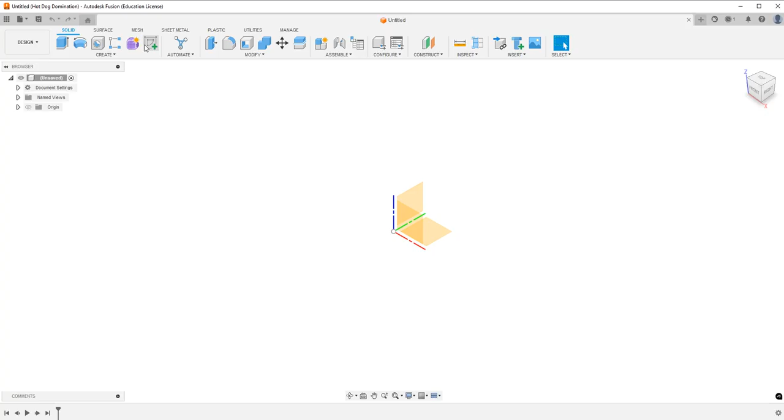So we will just begin. I'm going to start with a center diameter circle, and we will go off the center and bring this out. Even though I said the biggest outside diameter is 3 1/4, what we're actually going to do is make it 4 inches, so it'll just barely fit on the inside of there. Then we're just going to go with solid and extrude this.

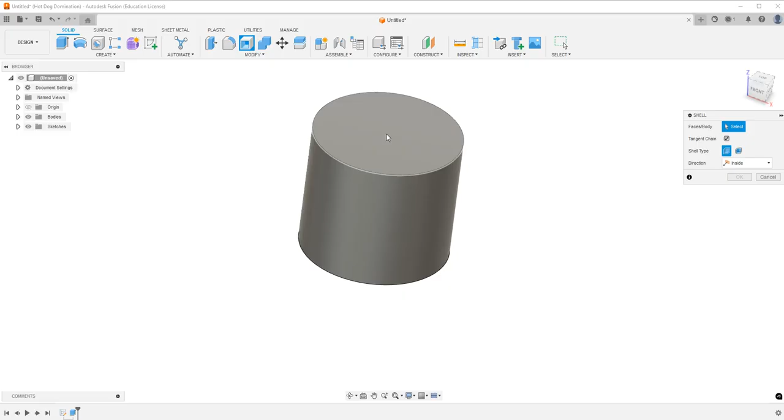So there's that. What we can do now is create a hollow kind of shape for it to sit in. We are going to hit this shell feature, and hit the very top of this because this is what we want to make hollow. We want the edges to be 1/8 of an inch, so 0.125.

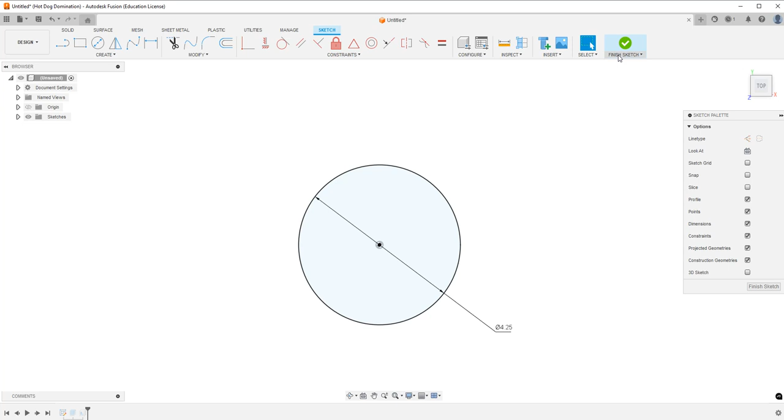And actually, I have to go and change something. This is going to be the inside where the mug is sitting. We actually have to make this 4.25 because of the size of the walls - the inside diameter is actually now going to be 4 inches. I'll show you what I mean, but basically you want to make this base 4.25. Then if we measure the diameter here, it should be 4 inches exactly now. You see, 4 inches because we made the walls 1/8 of an inch thick.

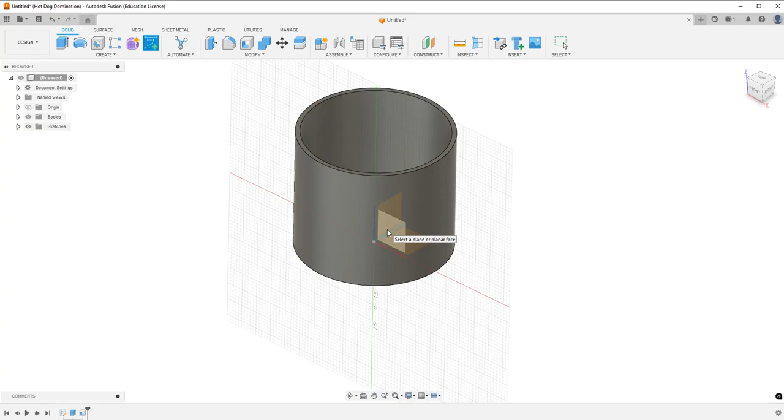So now I do need a slot for my handle for my mug, and that's pretty easy to make. You could just construct it on this plane and then just extrude it out, but I'm going to show you a little bit of a neater way to do that. It's going to involve a couple extra steps, but I think it's well worth it to make a nicer looking product. So we're going to go to construct over here, hit tangent plane, and hit this face right here.

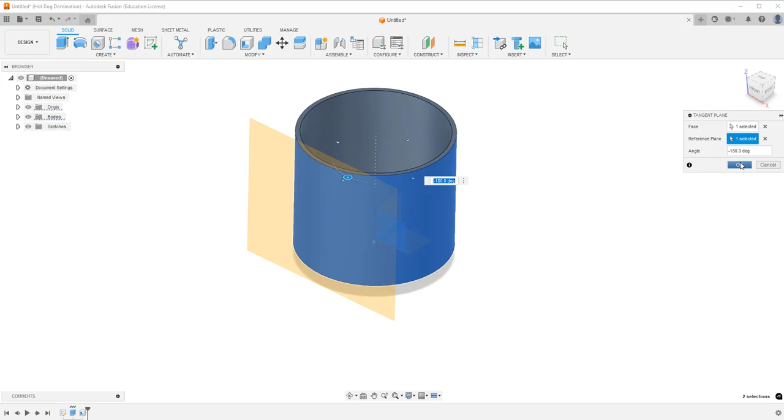And then the reference plane - it's going to be referenced to this plane here, which is the ZX plane, and it's on that side. I'd rather it just be on this side. I guess I didn't really need to reference that, but in any case, I'm going to hit this and start sketching on there.

Now we are going to hit center circle diameter. We're going to hover above here - not click, but hover and get that dotted line, and bring that out. I'm going to make it, I don't know how thick, maybe like 1.25. I think that's more than big enough, and we will make this sit about an inch above the origin.

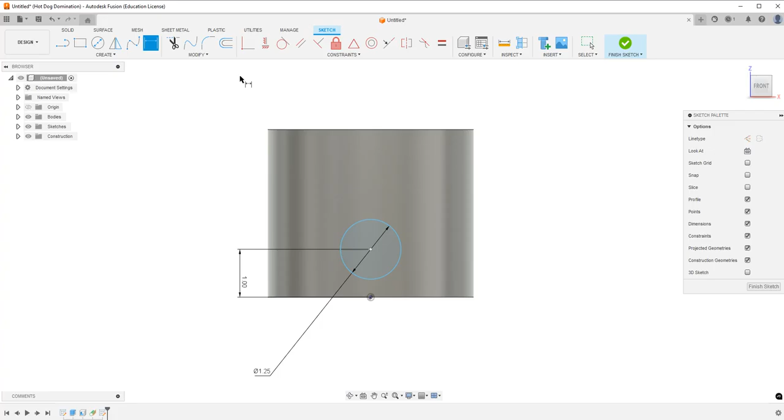As you can see, this is not currently set in place. I can grab it and move it around. So what we're going to do is hit horizontal vertical and make sure that the points are sitting completely vertical to each other.

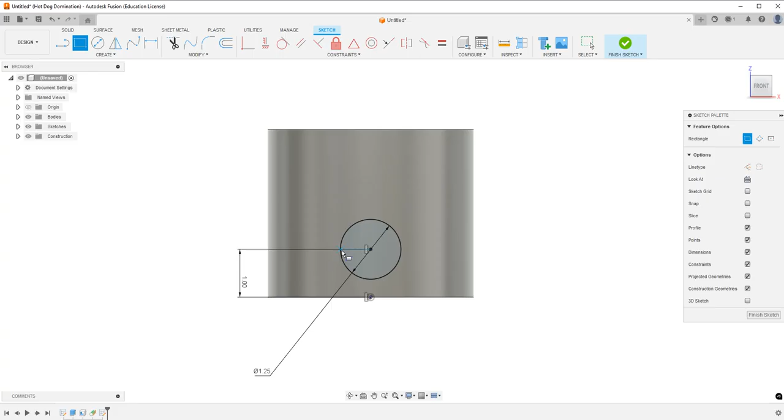Next thing, we're just going to go with a 2-point rectangle, and I'll show you a neat way to do this. We're going to hover above here, drag it out until we get that X, and bring it out. It does not matter how far up we go, not yet anyway.

We're going to hit coincident and make this coincident about here. One thing to keep in mind is I can still grab this and move it around. And I want this to be tangent to this circle. So we're going to hit tangent, and we're just going to go with this line and this circle, and bam, there we go.

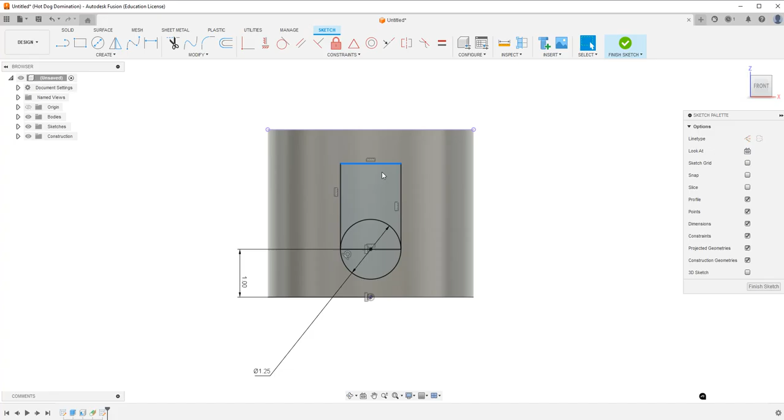Next thing I'm going to do is I want it to sit collinear on here. So I'm just going to hit collinear - oh, excuse me, I'm getting a little ahead of myself. I need to go to create and go to project include, and I'm going to hit project, and project this top line so that I can make it collinear, because it's not technically a part of the sketch surface. The sketch surface is not going to see this here because I'm technically making this whole circle up here projected onto this flat surface.

So now that's selected, I'll hit collinear. This is already selected, so I just need to hit here and we're good.

Now I want to make these nice and rounded, and there's two ways to do that. I can finish here and emboss it. I'm going to show you a different way, which is to do it with diameter circles, because the fillet tool will not grab this projection. So I'm just going to show you a new way to do that with center circle diameters.

This is not something you really need to do. You can just use the embossing tool and just use the 3D sketch fillets. But again, sometimes you're not able to do that depending on your project - you kind of have to do it this way. So I'm just going to show you this way.

First thing we're going to do is just create two circles in any spot, and we're going to make them equal to each other. And then we are going to define their size - I'll just go with 0.75.

Now what we're going to do is just set the circle's tangent to both this projected line, and we're going to set a tangent to this line here. So again, that's that one. We're going to set a tangent to the projected line and to the side line.

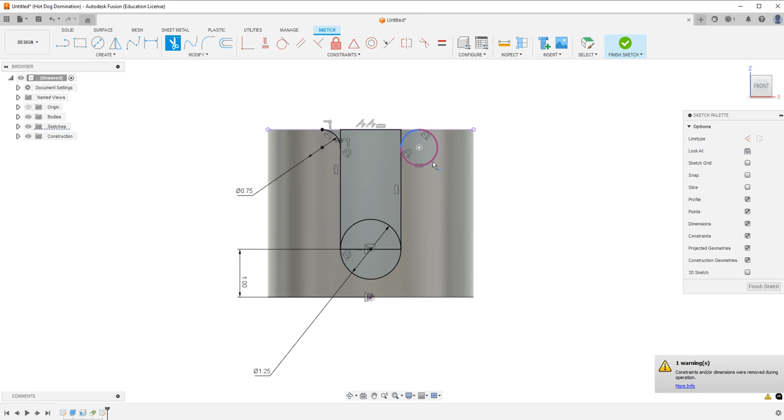And that's it. Now all we're going to do is just trim here, and we're basically done. And then I'm also going to trim here and this. Let's see now - oh, let's make this tangent to this, and yep. And that is going to be the slot for where our mug is.

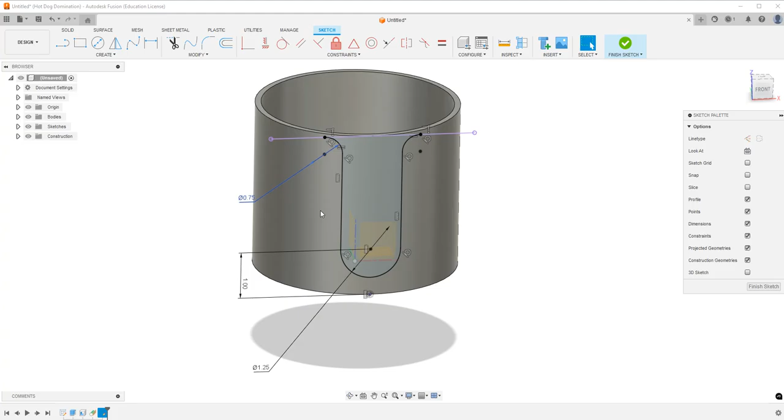Let's delete this. So what we're going to do, like I said, you could just make it on this plane here, but again I just wanted to show you a nice way to do that, because I'll show you why here.

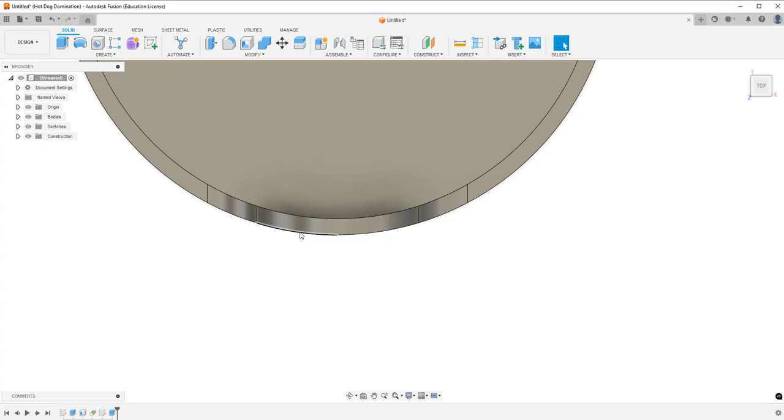You can just extrude this and go back, and that looks fine, but it's not really matching the curvature of the object. It's just kind of going straight in, and I feel like that's not really great practice when you're designing something, I guess, unless this situation really does call for it.

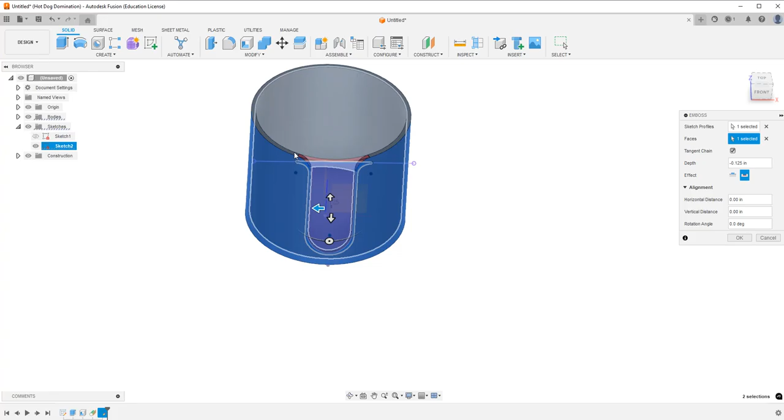So what I'm going to show you is go to sketch, reveal the sketch. We're going to use this embossing tool, select this sketch, and select this face to emboss. Oh, it's already selected. We're going to go minus 0.125, which is the thickness of this right here, and hit OK. Now if we get rid of the sketch and look on top, you see it's matching the curvature perfectly.

Okay, so now that that's done, we are going to make the part that's going to be holding this holder onto the desk. Excuse me, I can't really talk right now.

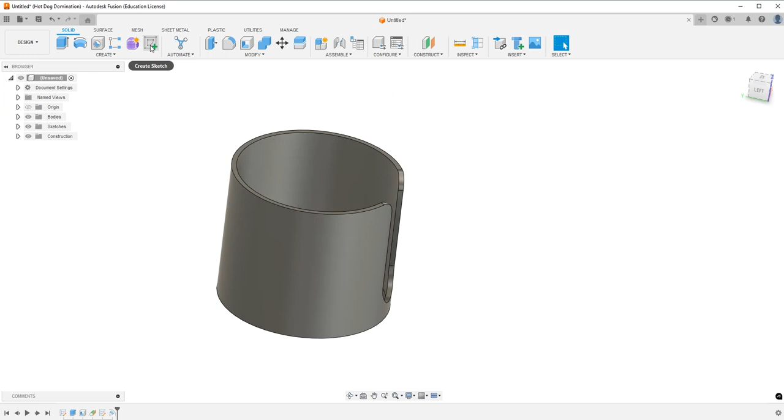So we're going to hit create sketch, and we're going to do it on this top lip right here. I'm just going to flip this down so it's a little easier for me to envision. We're going to use the line tool and move all the way out, and we will define the length. We'll go, I think 4. I think 4 will be good.

Next, we're going to make a line, not a construction line, just an arbitrary length line out here, and then connect it to the midpoint. So midpoint constraint, this point to this line, and now it's perfectly in the middle. And we are going to bring this out.

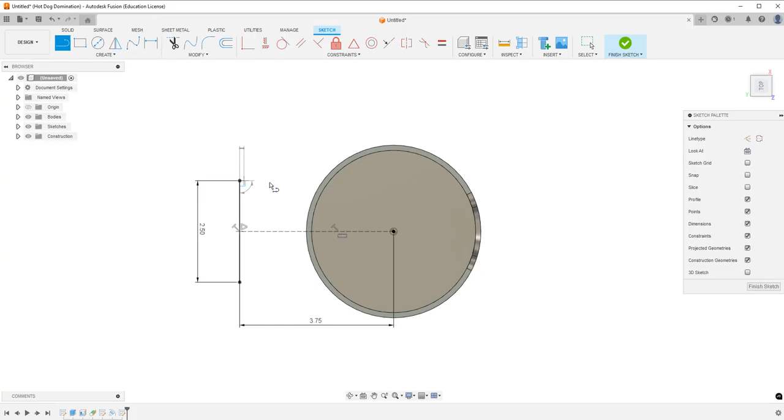Well, that's a nice size. We'll go 2.5, and actually we might even go like 3.5. No, 3.75, that's fine. So then we're going to have two lines going out, and they're just going to intersect exactly where this is.

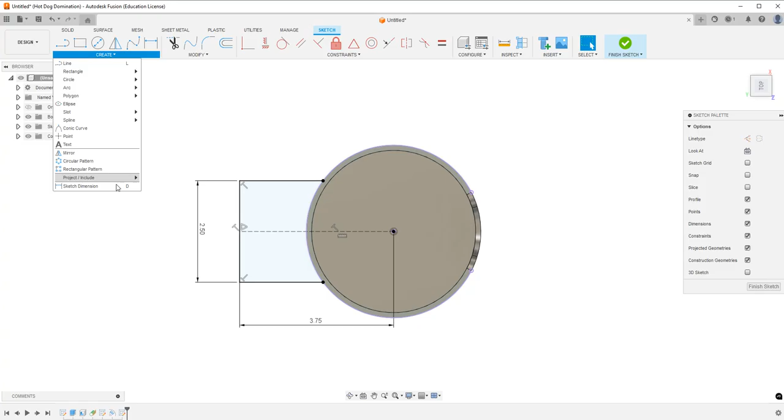Now, you could do a center diameter circle from here out, but just to keep you from doing that, because you could mess it up—at that point you're working with sizes and might not hit exactly here. So the safest bet for me is just to project it. Go to create, project include, project, and hit this outside.

Then we're going to go to solid, extrude, and we're just going to extrude this down. I want it to be fairly strong, so we'll go down like half an inch. Okay, so I like the look of that.

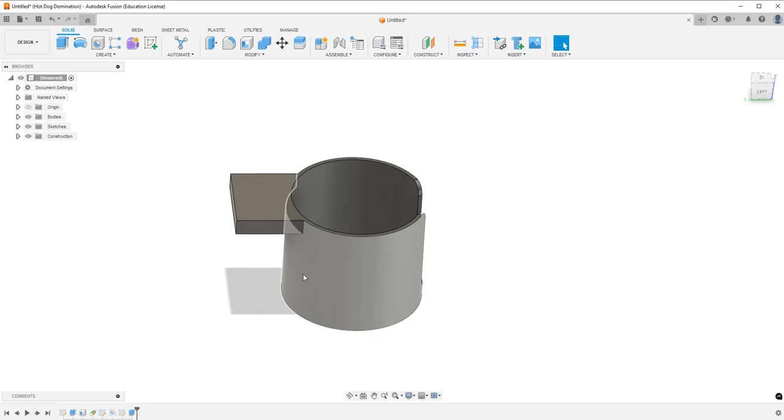And we actually have to make this again, but more down here, because we need something for our thread to go through. And we can't just do that in midair, so we're going to create an offset plane.

It's going to be—I'm going to hide the bodies—off of this plane, which is the XY plane, right? Oh geez, oh gosh, there we go. So it's going to be off of the XY plane.

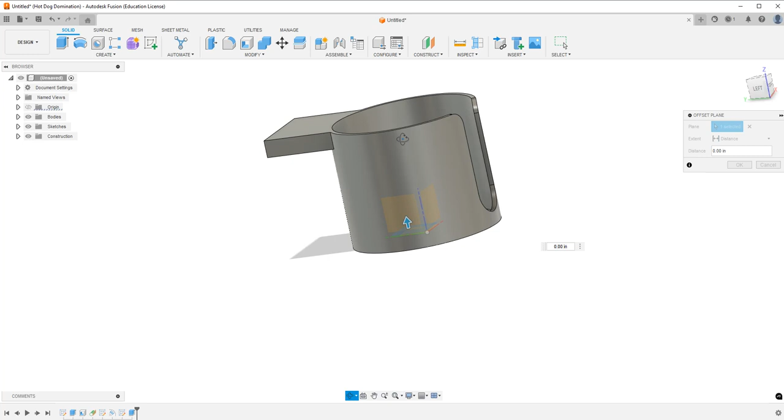And something that I do to help me envision it, I'll go off of the normal plane, which is the ZY plane, and bring it up to how far I think I need it. We'll maybe bring it up like 1.5. And we can always adjust this as we need it.

So now we're going to create a sketch on this plane. And all we're going to do at this point is project this, this, and this. And now we're going to do the thing I said don't really do, center diameter, and connect it to this point.

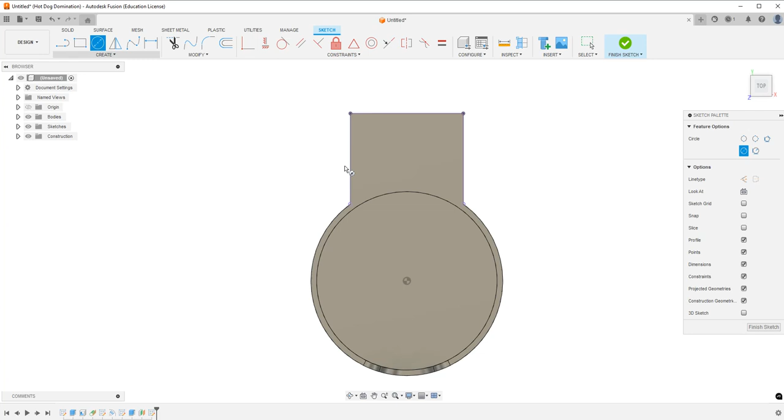Then we're going to just trim that. Okay, no—oh, I just trimmed it again on accident. So there we go. And now we can bring this out. I think that's a good size.

We can bring this down another 0.5, and let's measure the distance between them. So from here to here, 1.5. At this point, you would measure your desk and see how far it would be.

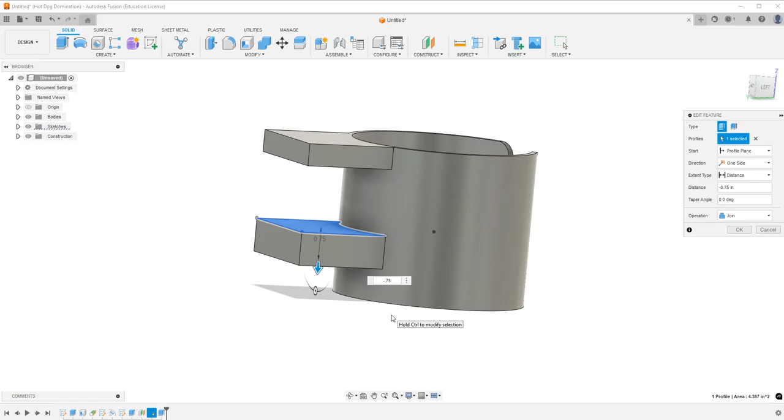Then, since there's going to be a thread in here, I might actually want it to be a little thicker. So maybe minus 0.75, and the sketch I'm going to bring down, instead of a 1.5 distance, we'll go like 1.25. So now there's 1.75 in here.

Okay, next what we'll do is create a hole right here, and that hole is going to have the thread so that we can lock this onto the desk, because right now we just have an open space, right?

And in order to model here, we're going to use section analysis, get rid of the bodies again, select this, and open up and unhide the bodies. Now it looks like nothing's unhidden, but it's the section analysis doing its job.

So we're just going to take this, grab it, and drag it up until we see this little blue section, until it turns the same color as the solid. And there we go, we're done.

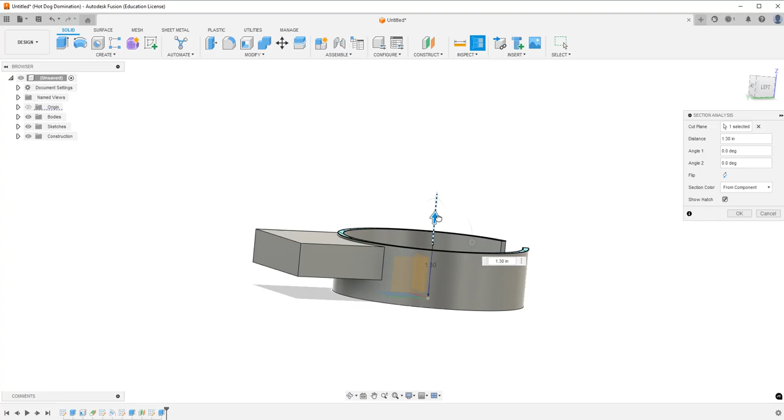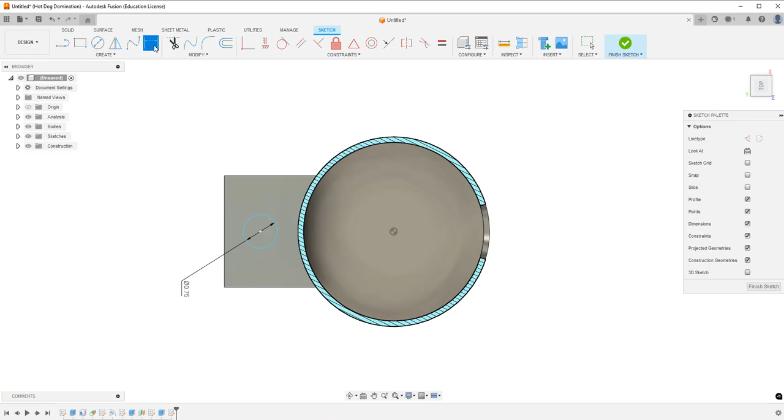Now we can perform a sketch on here. We're going to select this, create sketch, and create a circle, and it's really going to dictate how much space we have. It looks like we can comfortably do a thread with a 3/4 diameter. We'll go off here, call it 3, maybe 2.875. I want it to be close to center, but the actual center doesn't matter.

As you can see, this is still not fixed in place, I can still move it around. So what we'll do, like we did with the first one, is go horizontal, vertical, hit the center here, and hit the origin, and that fixes it in place.

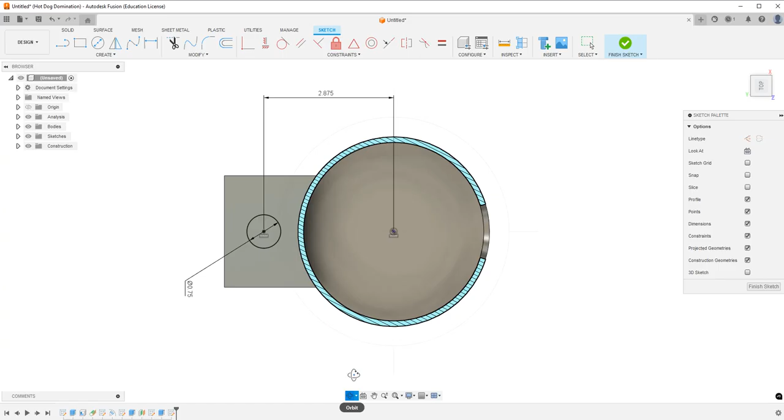Then we can do solid and extrude this all the way down. Now, we could have done that when we extruded this here, we could have had that circle, but in a case like this, when we have a thread here, I want to be able to control the size of the circle on a separate sketch.

Now we're gonna unhide this analysis, and that's what we got. We're gonna create this thread now, and creating a thread is very easy, so stay tuned to the end of the video, because with a 3D printer you can't just create a thread and expect it to work, since threads that they model are going to be exactly like they are in the real world. With 3D printers, you have to account for shrinkage, cooling, and all that kind of stuff, but I'll show you what works for me.

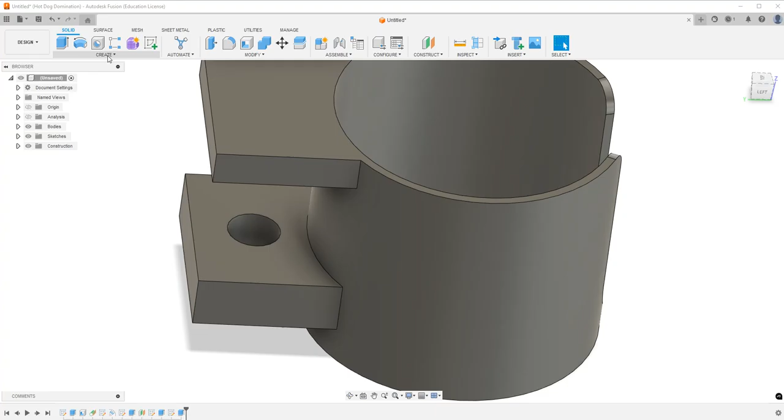So we're going to create the thread, hit create, go to thread, and just highlight this here, and it should auto-populate. We have a 3/4 10 UNC thread, which is exactly what I want to use. Let me open this back up. So in order for the 3D printer to actually make the thread, right now it's still a solid cone. Open this up, and you're gonna hit the modeled function, and now we have actual threads in here. But for the meantime, we're gonna leave it unmodeled, just leave it as a cone.

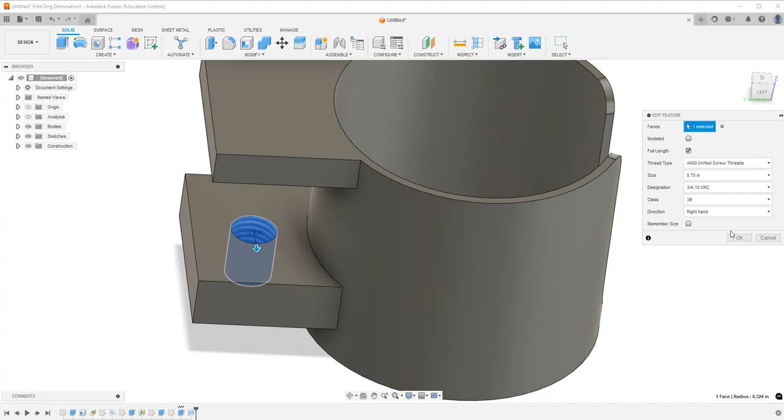So now we have to go through and make the threaded rod that's gonna be here. Right now, we're just gonna save this. We'll call it desk cup holder. We're going to save it in our project, wherever we're going to save it. Just make sure it's saved, and we're good.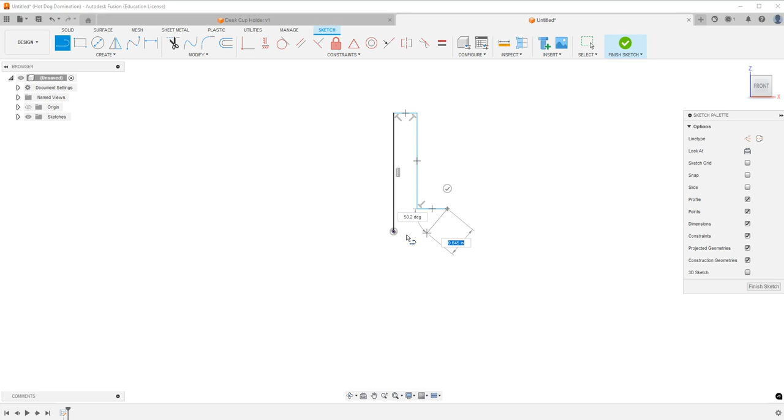It is there. So we're going to make a new design, and this is going to be for the threaded section, the threaded rod. We're going to create a sketch and go off of here. What I'm going to do is create the basic outline, which is just going to be the start of what looks like a bolt head.

The first thing I want to do here, since we are doing a 0.75, is revolve it around this axis. So a 0.75 thread divided by 2. Next thing is this here, which we should check to see what the distance is from here to here. And this is another reason why I made this not modeled, because it's going to be a lot easier to use our measurement tools. We're going to show snap points, go from here to there: 0.75. Beautiful. So this has to be at least 0.75 in diameter.

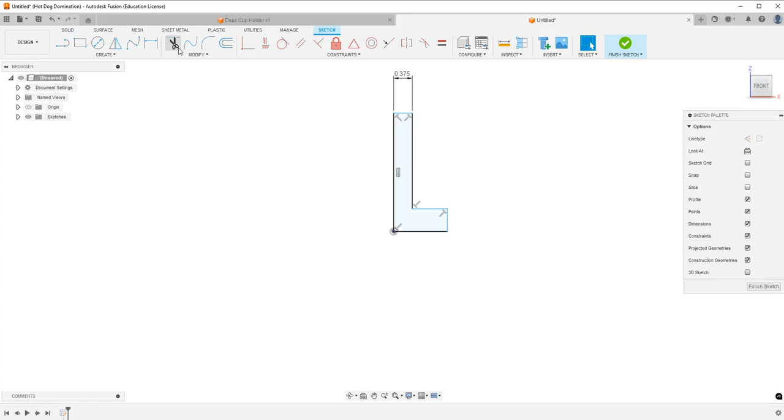And instead of 0.75, we'll go with 0.65 just to give ourselves some breathing room. This can be any dimension you really want, and we'll just call it 0.5 just to make it nice.

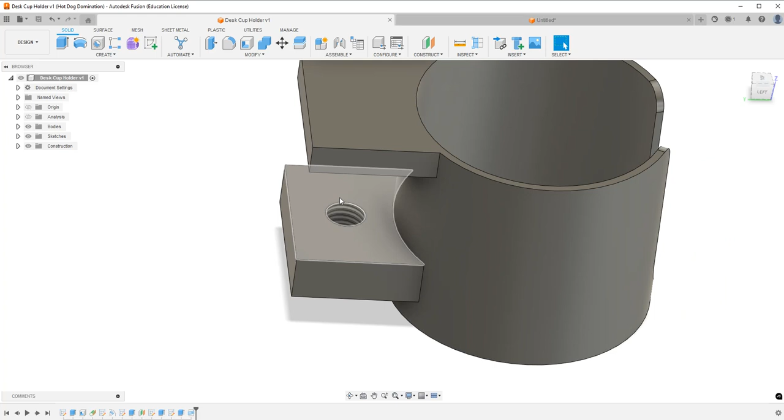Now, what we need to know is the distance from here to here. So we're going to inspect. We can get rid of the snap points right now. We're going to go from here to here. Or if you want it to be a little more exact, we can go from here to here, 2.5. So we're measuring from face to face, not line to line, because in case one of the lines is curved for some reason, it's better to go face to face.

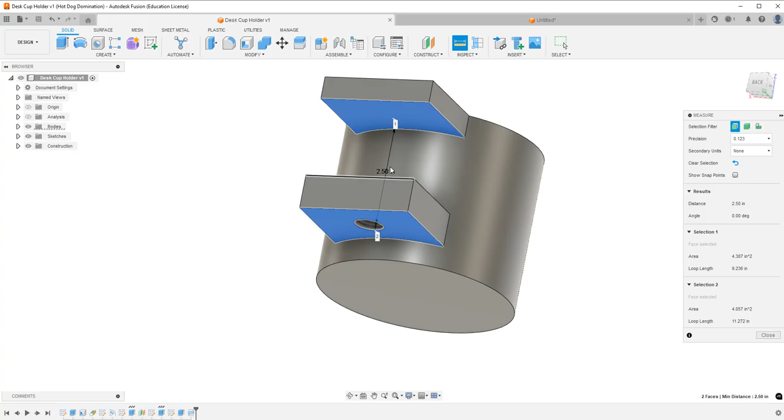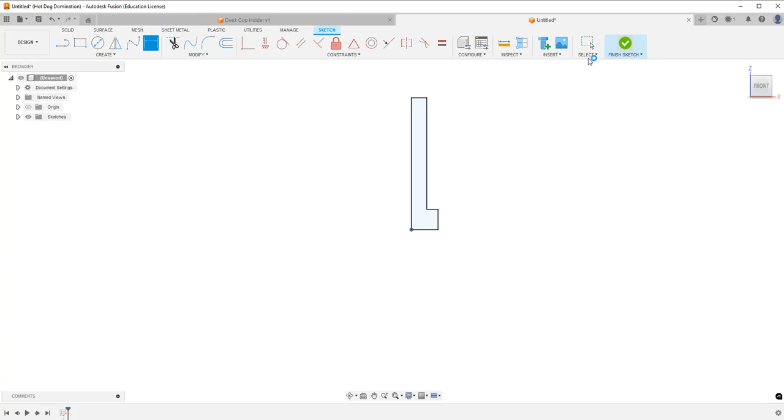Now, of course, it doesn't have to be exactly 2.5, because we're going to have a little foot here that's going to be placed on there, but it's better to have more thread than less. So we're going to go here, and it has to be 2.5. I'm going to make it 2.5 plus 0.25, so 2.75. There we go. We're going to finish the sketch, and we are going to revolve it.

And it's already selected the profile. We're just going to revolve it around here.

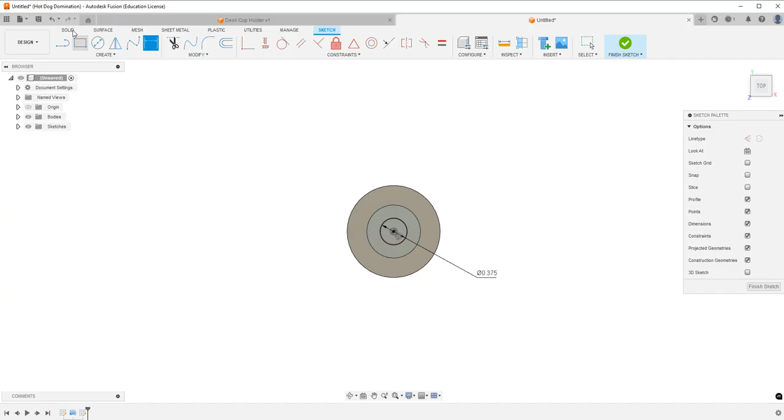Next thing I want to do is where the foot is actually going to be glued into here, and I want it to be glued on the center there. So we're going to create a sketch, and I'll show you exactly what I'm talking about. We're going to make that 0.375 about the center, and we're going to go to solid, extrude, and we're just going to extrude this down. It doesn't matter how far, we'll just go minus 0.4.

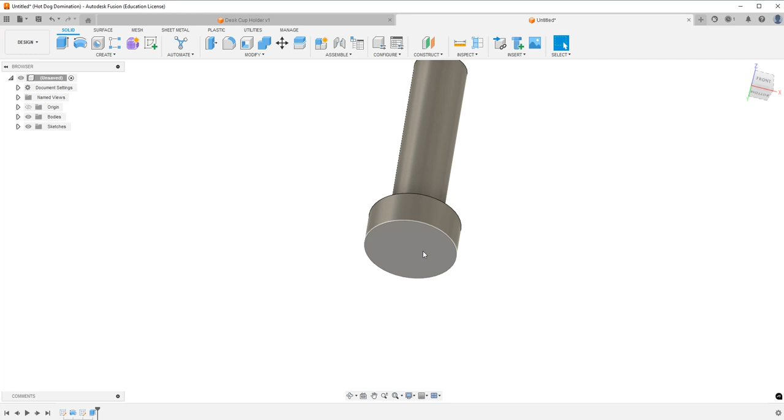Now, we could make this a hexagonal head, but what I'm going to do instead is bring out like a little latch that you can grab onto. So we're going to create a sketch on this face, do a 2-point rectangle, and we're going to do a center rectangle. We're going to go off the center and just kind of drag it out as far as we really want, and these dimensions will kind of be up to us.

I'm going to make this 0.375, and I'm going to make this 1.65. I think that'll be fine.

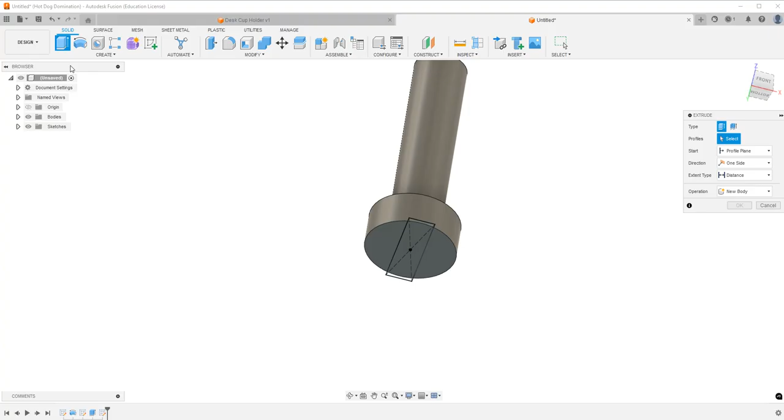Oh, you know what we do need to keep in mind? The distance from the center to up here - we can't have it be more than 0.75. So we'll do 0.7 times 2. That's fine. So we'll do that, and then we are just going to extrude this out. Make sure you hit every face, and we'll extrude it out 0.7. I think that should be good, and yeah, I like how that looks.

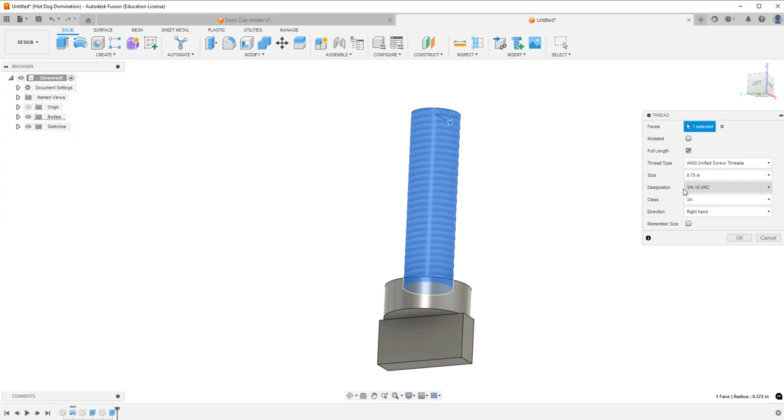So now what we're going to do is make threads onto here. Again, we're going to hit create, go to thread, and we're just going to select this face, and it'll auto-populate 3/4 to 10 inch UNC, 3/4 - 10 UNC. Okay, I like how this looks.

I am going to add fillets to everything last as I usually do. And we're going to save this, and we'll just call it a desk cup holder thread.

Last thing we're going to make is the part that is going to actually clamp everything onto the part that's going to clamp the desk onto the desk.

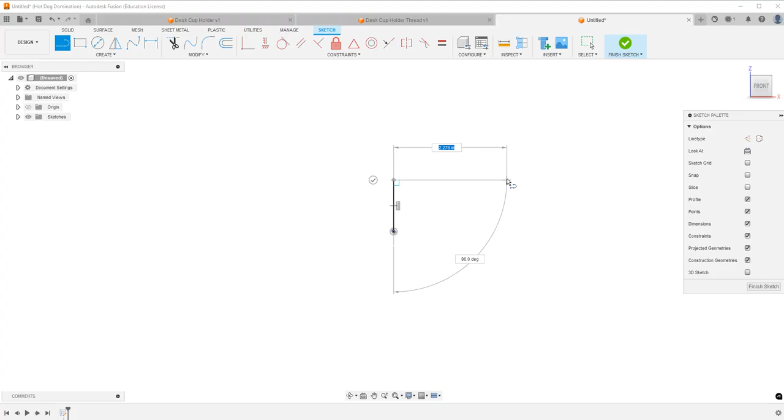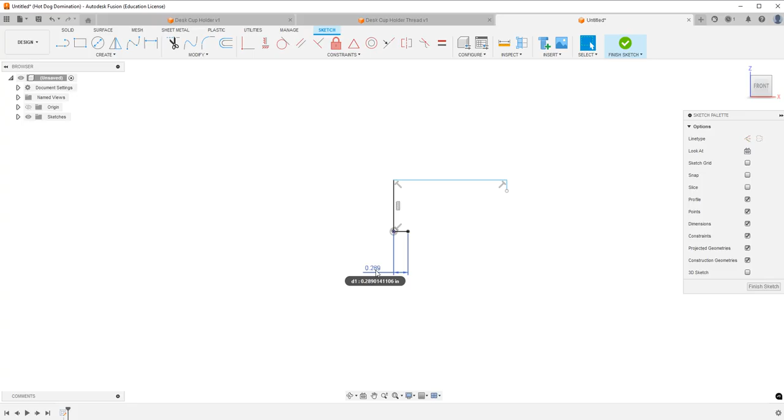So we're just going to create a line, and again, I'm just going to do a general outline of what we need. So I'm basically doing this side and these two and these three sides here. I'm leaving this blank over here on purpose, and I'll show you why. So right now, this area over here is actually what's going to - oh wait, hold on, I'm missing something, I apologize.

This is gonna go down. Okay, there we go. So now this is actually gonna go in the hole that we created.

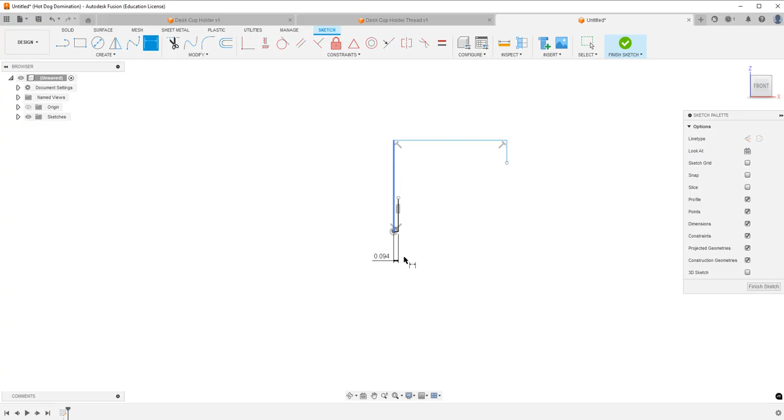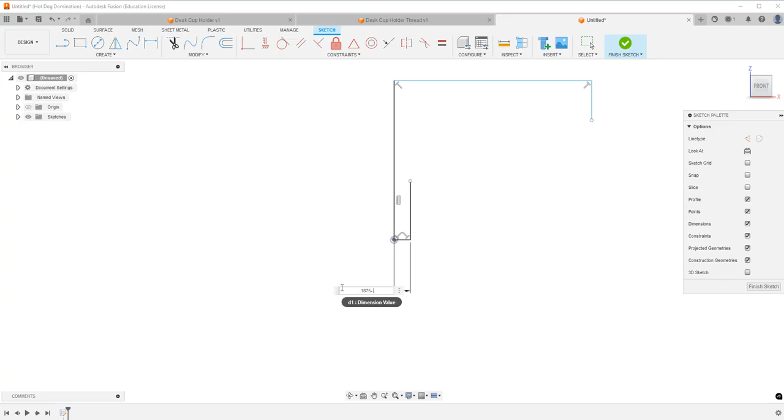Okay, so next thing that we're going to do is we're just going to kind of adjust this to how we want it. It's nothing really all that crazy. This has to be 0.75 at max, so we'll make it 0.7.

Then we'll make this - here, let's just move this down actually. We'll eyeball it first and then we'll set it. All right, here to here, 0.92, we'll maybe call it an inch. And then this we'll call 0.125.

All right, so now here's what I'm going to do. I'm going to create a line, drag it out, because what I want to do is create an arc, a 3-point arc, and I'm going to go here, here, and bring it out.

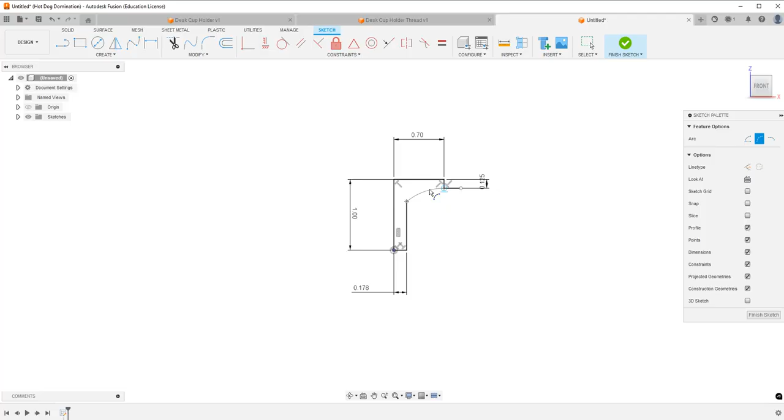And now, because of this line, it will automatically populate a line that's tangent to this line. Oh, and because of the depth that we went here, which is 0.4, this is going to be something less than 0.4, 0.375.

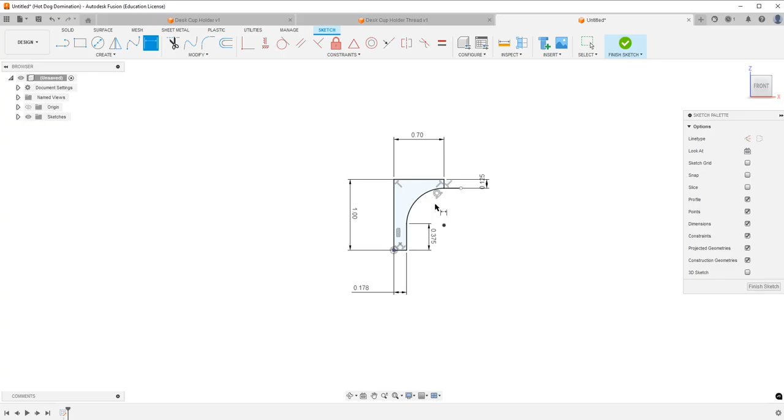So we have to get rid of this, delete this, go 0.375. There we go, now it works. And now we can make this the size that it needs to be.

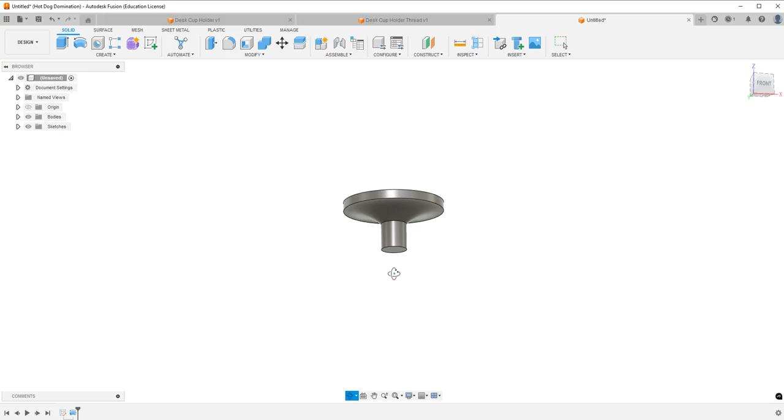And that's it. And what we're going to do is we're going to revolve this around this axis, and that is going to be kind of like our little stomper thing, our little foot. So we're going to save this, and we're just going to call it desk cup holder foot. Okay, that's it.

And now, as I usually do at the end, I will always add fillets to things.

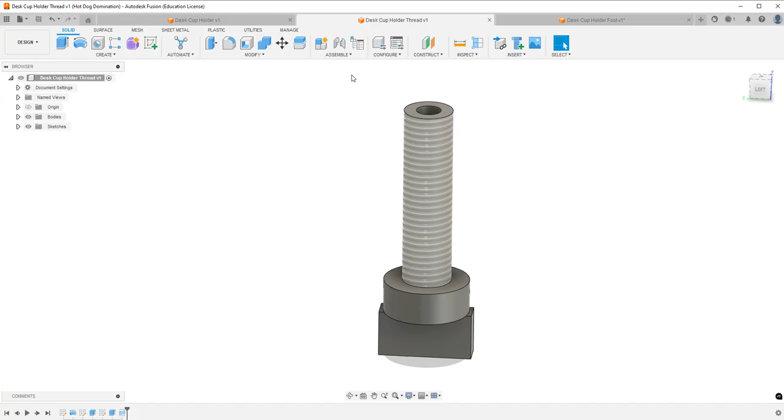This will be a 0.02 fillet. And then this will be, I'll show you something here. This will be a 0.03 fillet.

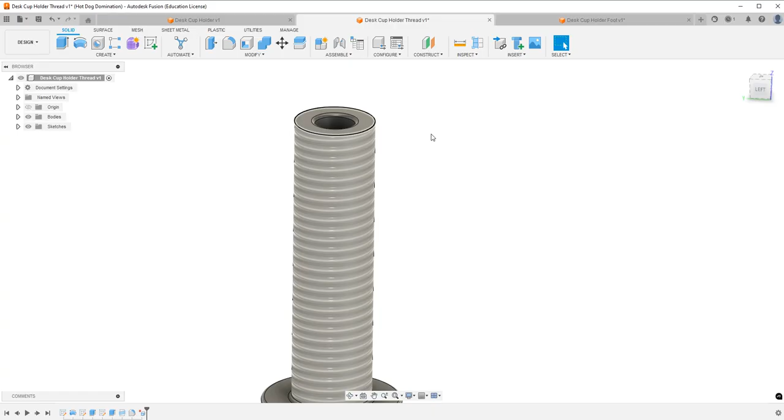This fillet here, so if I actually get rid of the threads, the fillet that's... well, I can't really do that because of how I organize it, but it's fine. This fillet here, I'm actually going to highlight it and delete it because it could potentially mess up our thread, and we don't want that.

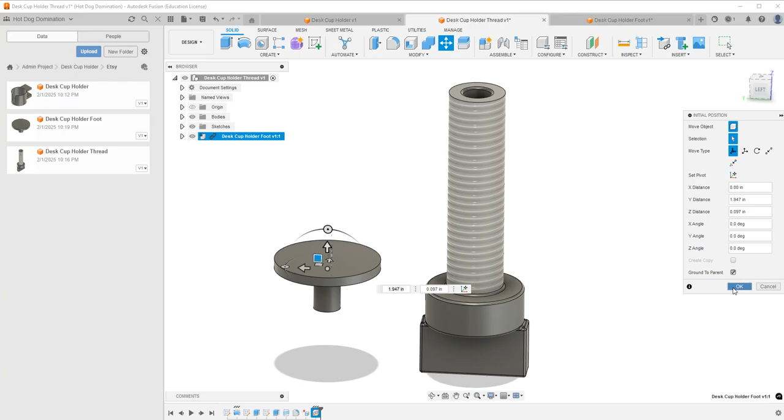So now we're going to highlight this thread, or actually no, not yet. We're going to open up everything, and now we're going to start putting everything together. So I'm going to get the desk cup holder foot, drag it out here, and it'll populate right there. I'm just going to move it out for now. And now what I'm going to do is I'm going to angle this down.

I'm going to hit the joint feature, and I'm going to hit this circle here, and then I'm moving up, and I'm going to hit this up here. Make sure you're hitting the top one, not the bottom one, and it will automatically join right there. And you can kind of see what we're going for at this point. So we're going to hit OK, and we're going to save this, and OK.

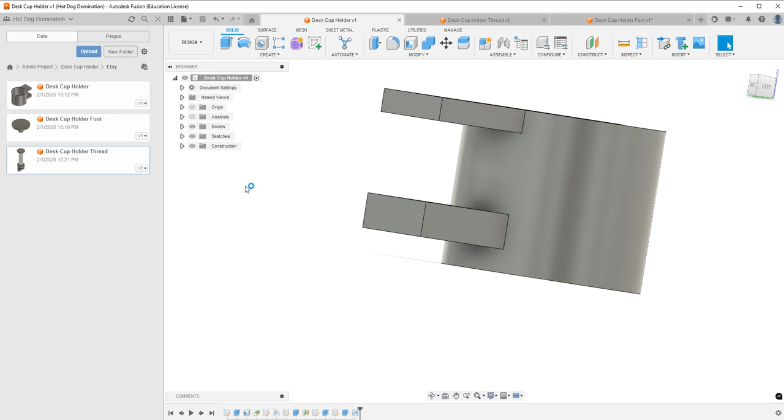So now when it saves, it has the little desk cup holder foot. And we'll go to the desk cup holder original, and what we're going to do now is we're going to take the desk cup holder thread, and we're going to insert it into here. All we're doing is hovering our mouse over this, holding the mouse down, and dragging it out here. And now it's there. So we're going to take this and bring it out.

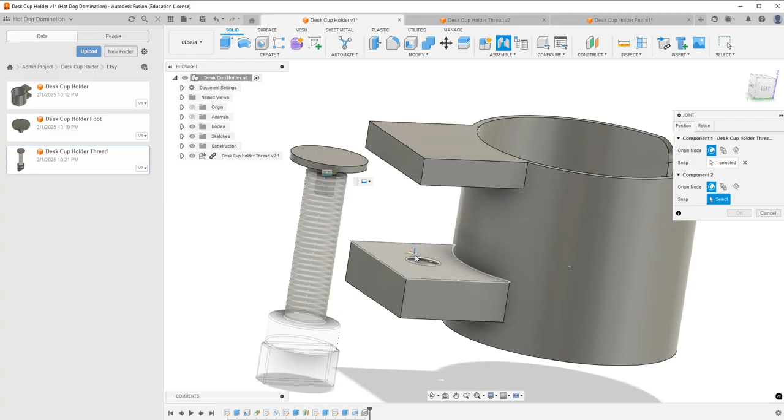Hit OK. So now what we're going to do is we are going to do another joint. We're just going to go with the top here. I'm going to angle it a little bit so you guys can see better. It doesn't really matter at this point where you put it because it's for visual purposes, but I'll just join from the top here to this right here. Make sure it's snapped to the center, and it moves all the way down there like that. We're going to hit OK.

And now we can grab it. No, we're going to have to highlight this. Because it's a rigid selection, I don't want it to be rigid. I want it to be a slider joint. See? So now it's moving up and down. And now I can grab it and move it up and down.

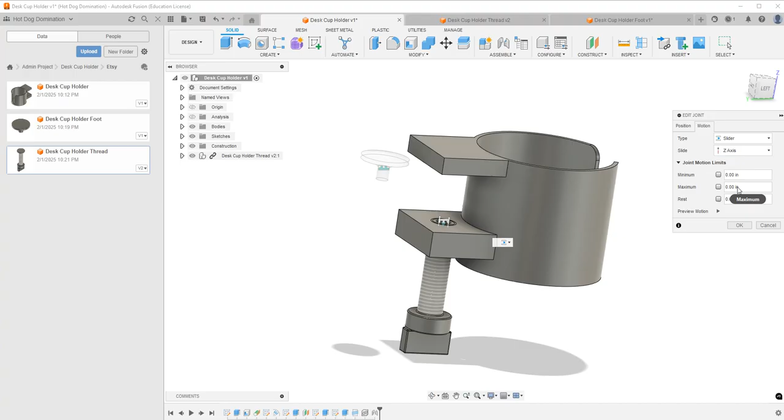What you can do is with the slider joint, you can establish your minimum and maximum. I'm not going to do that for here, but I believe the minimum would be here and the max. Hold on, we're going to highlight this max. The max would be like 2.5, I believe. Oh, okay, so instead of a maximum, we're going to go with a minimum 2.5. Maybe a minus 2.5. There we go.

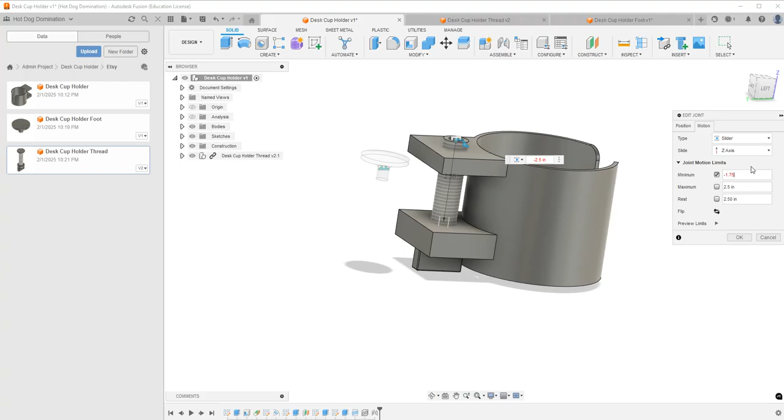Oh, well, it's going to be more like 1.75. It's going to be the distance from here to here. So now I can't slide past that. But like I said, for our purposes of what we're doing, it really doesn't matter. So now we have this here, and we can slide it up and down, and that is our cup holder.

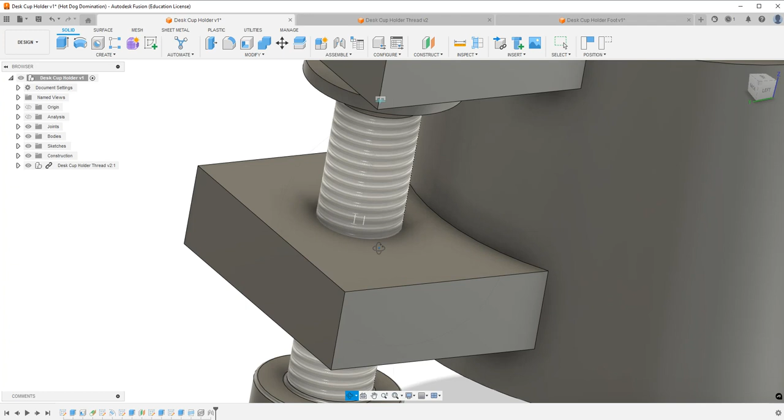But like I said, we need to actually model the threads, because as you can see right now, if I do a section analysis and go here and flip... come on man, what are you doing to me? You can see that these are actually digging into each other. So when you 3D print it, these will not fit. So now we are at the point, yeah, see, this is hidden inside a little bit.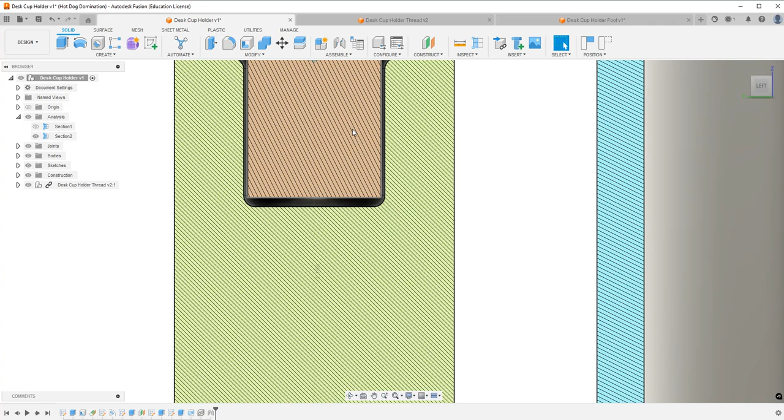Just so you guys know, this is planned to be glued in here with like JB Weld or something. So if you want to adjust the diameter here to be a little bit bigger so it's a tighter fit, you're more than welcome to. I was planning on just hot gluing or super gluing it in there or something.

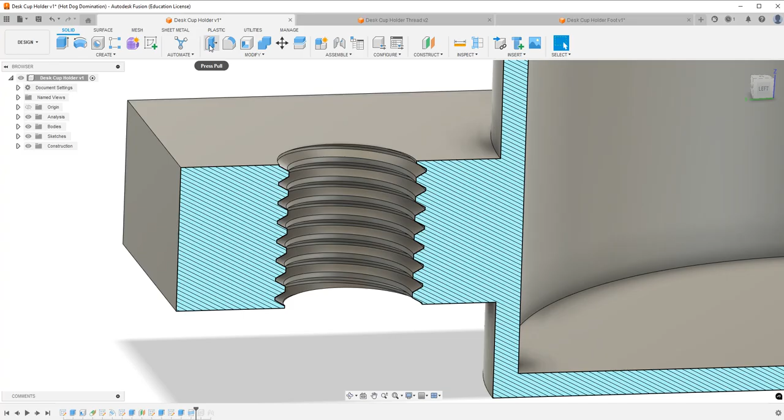Okay, so next thing that we're going to do is we're actually going to model the threads. So we're going to hide this joint, open up the threads, and we're going to model them. Threads, when you 3D print them, like I said, they're not machined, they're not precision made. So we're actually going to have to shrink up these threads to accept the threaded rod here. Because if we don't, it's just going to do weird things. It will not nicely bind together. If you guys want to try 3D printing the thread without what I'm about to show you, you'll see for yourself that it will not work. I have done some experiments myself and found this to work. So we're just going to press pull.

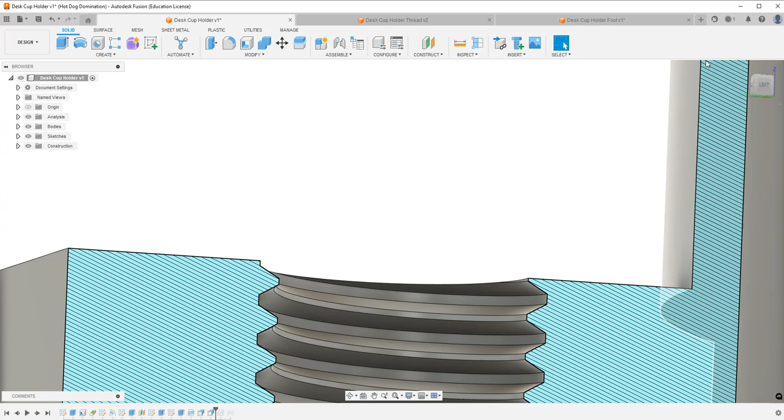We're going to hit the top of the thread, and go minus 5 thousandths in. We're going to do the same thing with the bottom. Press pull the bottom, go 5 thousandths in. And then we're going to do the actual face of the thread.

Ignore what I just said. Hit the face of the thread. We're going to press pull here, and here you can go anywhere from 5 thousandths to 10 thousandths. I'm going to go 5 thousandths.

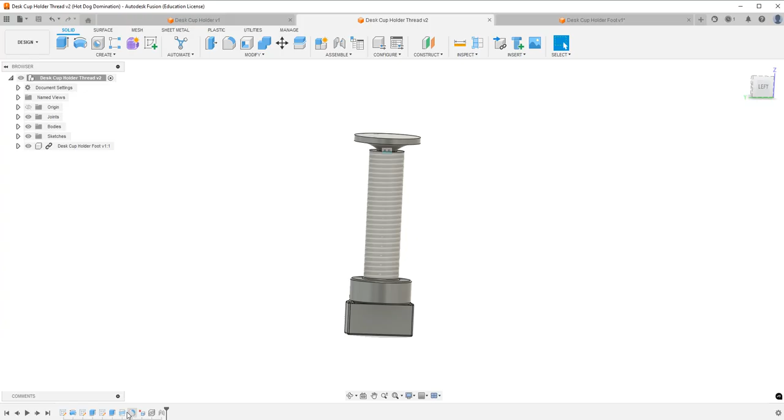Okay, so now we're going to save this. Hit OK, and we're going to go back to this thread here, and model the thread. This one does not need to be adjusted.

Uh-oh, some stuff happened. What happened? Let's see. Oh, it doesn't like that I did all that. So what we're going to do is just delete this stuff here. Yeah, that's fine.

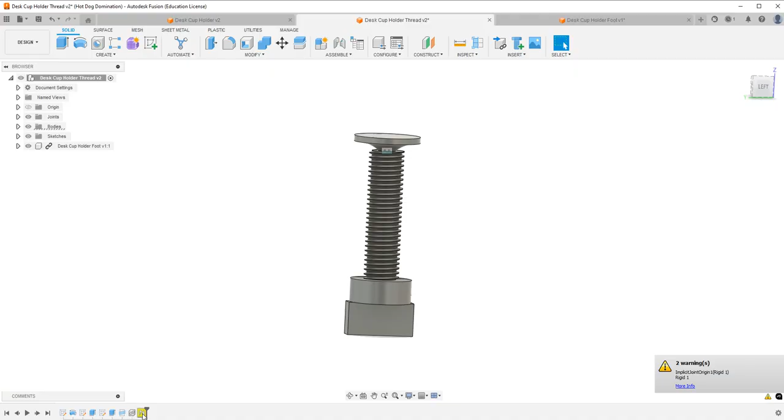And that's missing its reference. Okay, so we're just going to cancel, and delete this. We're just going to do all that over again. It's not really a big deal. Sometimes you just gotta figure some stuff out.

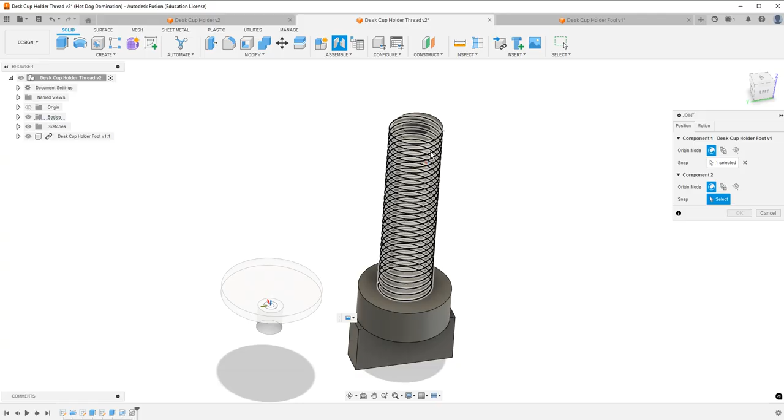So we're going to go here and right there. See if that works. That works perfectly fine. And then we'll just fill in everything ourselves. It's not a huge deal.

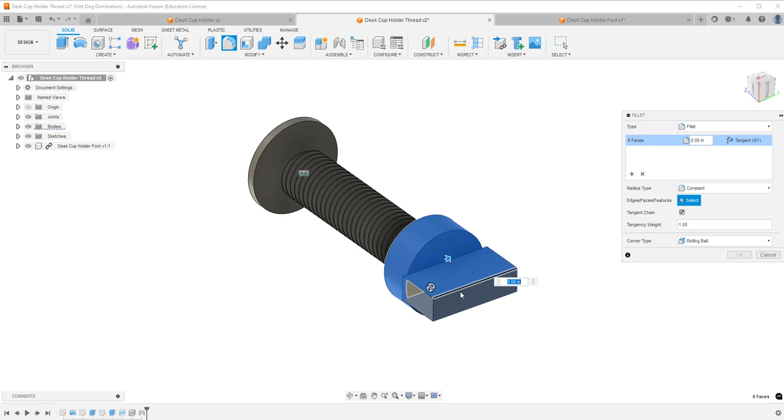Stuff like this just happens, and you don't have to worry about it. It happens, and you figure it out, and you move on. Just keep going. No reason to give up when one thing goes wrong.

We'll go 0.03, and there we go. Good as new. So now we're going to save this as it is, because now we have a modeled thread, and it says it's not up to date. So we're going to hit that, and it's going to make—oh right, I got to open these up—and we're going to hit this, and it should populate with the threads.

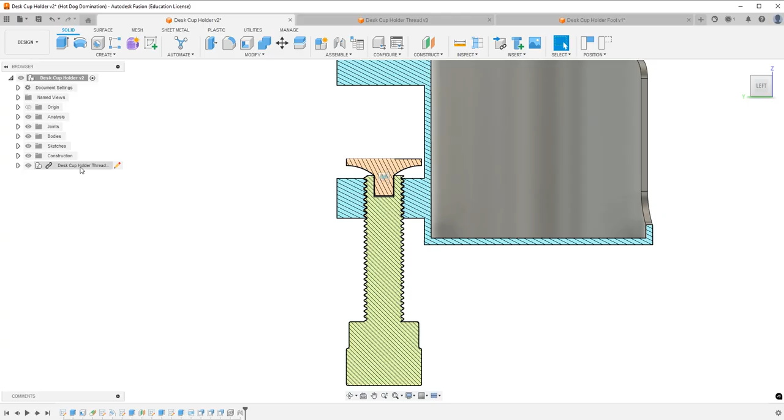There we go. So now if we grab this and move it up, you can see that it will accept the threads. If we had this sticking out, it still would have done it, but it would have been impossible to thread on. And that's it. The analysis we can ignore. That is our holder that is going to be on the side of our desk.

So yeah, took a little while. I tried to move a little quickly just to give you guys not as long of a video, because I could stretch this entire thing to like an hour, but I don't want to. I'm sure you guys don't want to listen to me for an hour.

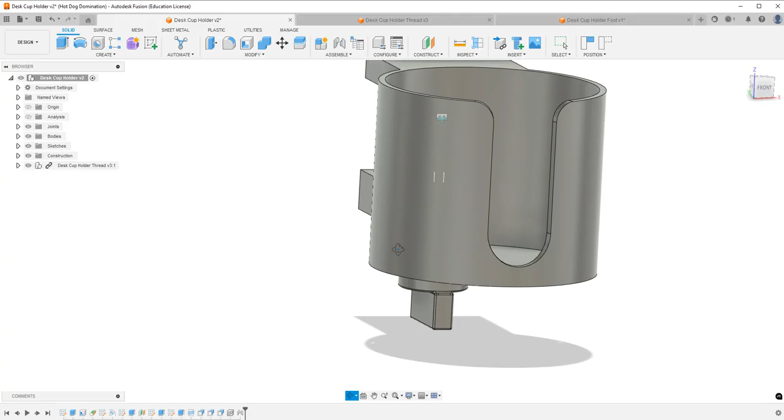So basically, this is just going to go onto a table, and your fingers, or I guess if you want to put a wrench or something, is going to tighten everything down to the desk. Oh, and I guess I could make some fillets here to make this a lot cleaner.

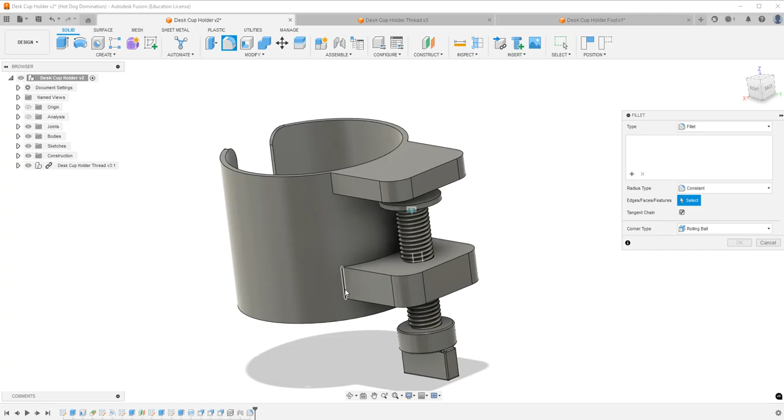But again, it's—oh, 0.05, 0.5. But that's going to be really up to you guys. I would like to actually put fillets here, because it's going to make it a lot stronger and less likely to break off.

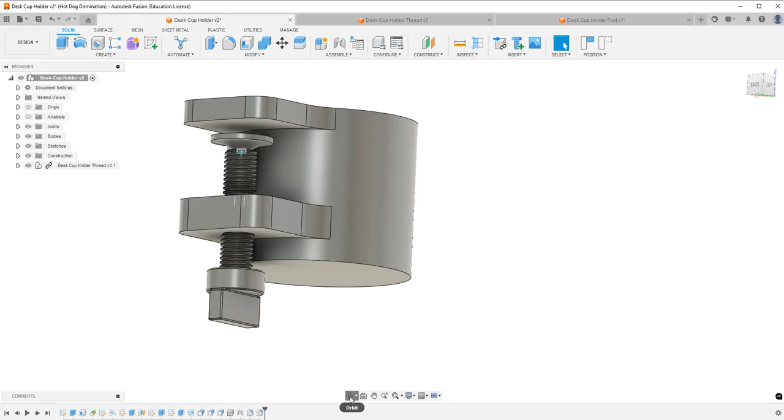So we'll go 0.05—my gosh, 0.5. Let's go like 1 inch. Oh my god, 1 inch. There we go. I would put something here, but because a desk might be bumping up to it, it's not the best idea. But yeah, that's how you make it.

This was a bit of a longer video, a bit of a tougher thing to model up, but I hope you guys were able to learn something from this.